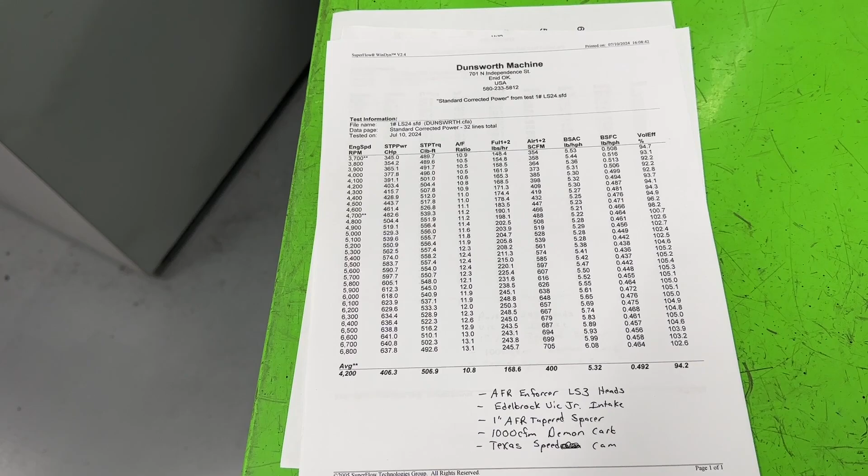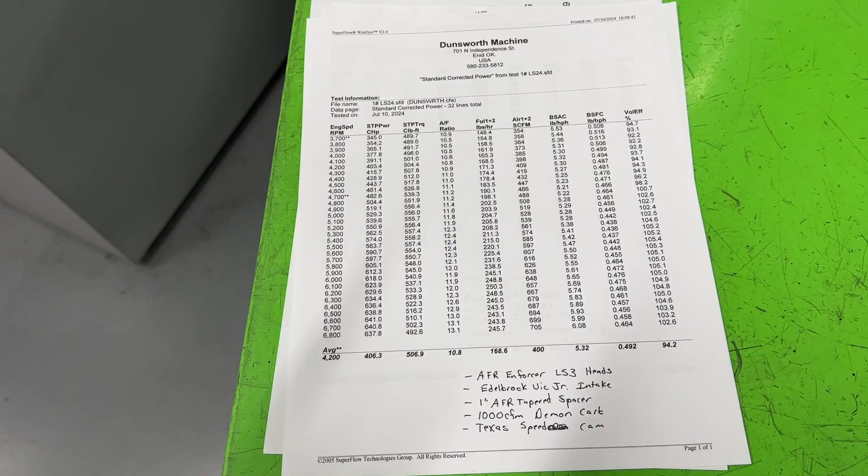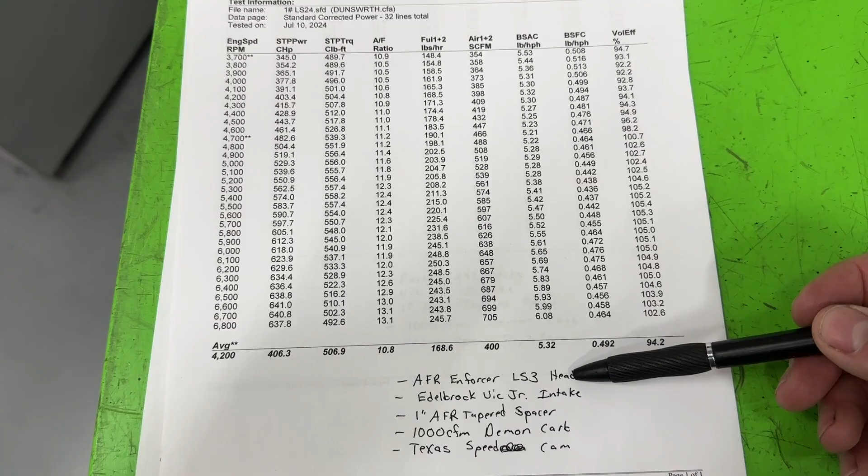This one you might have seen from the last video. This one right here is the AFR Enforcer LS3 head. So that's this head, completely stock.

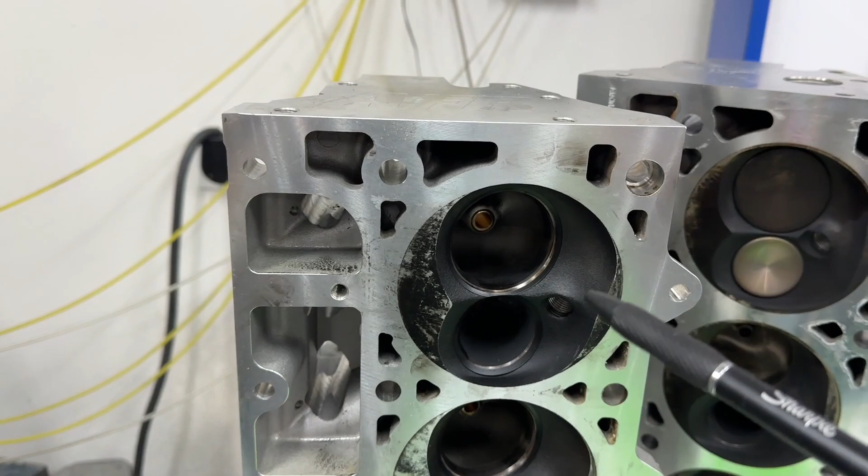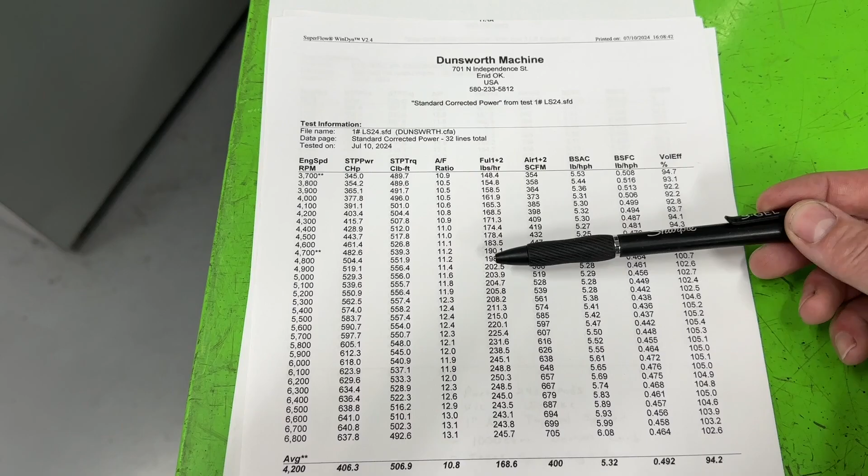I will tell you through this whole entire thing, ignore this air-fuel ratio, because right away it looks really rich. Some people have commented, why does it always look like your chambers are so black? You should really lean this thing out. This air-fuel ratio that comes here is calculated, and it looks like that, you would think it looks like that. But there's something going on with the air turbine, I think it's getting stuck or something. The fuel turbine, the way it works is the computer says this is the amount of air that goes through, this is the amount of fuel, that's your calculated air-fuel ratio. But that's not what the O2 sensor is reading, because I'm watching the O2 sensor, and it varies.

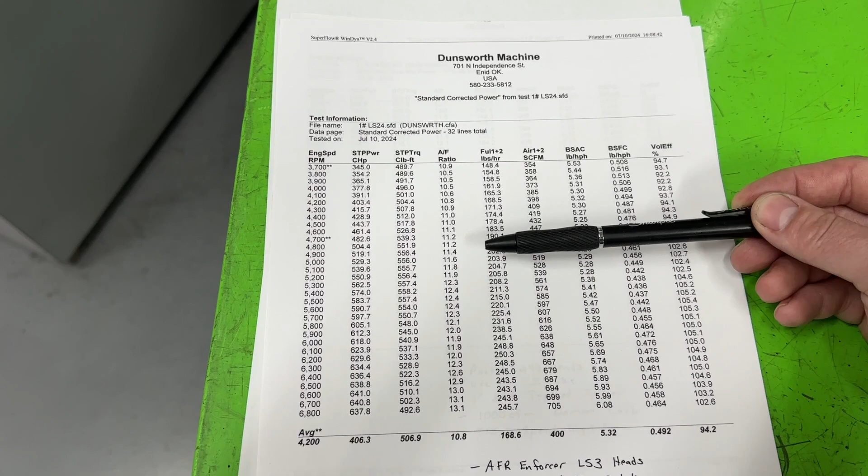So on an LS engine, this is weird, it goes really lean when you start a pull, then it gets almost normal in the middle, then really rich towards the end. This isn't tracking that at all. It's just not correct. So what I'm trying to say is you can ignore this.

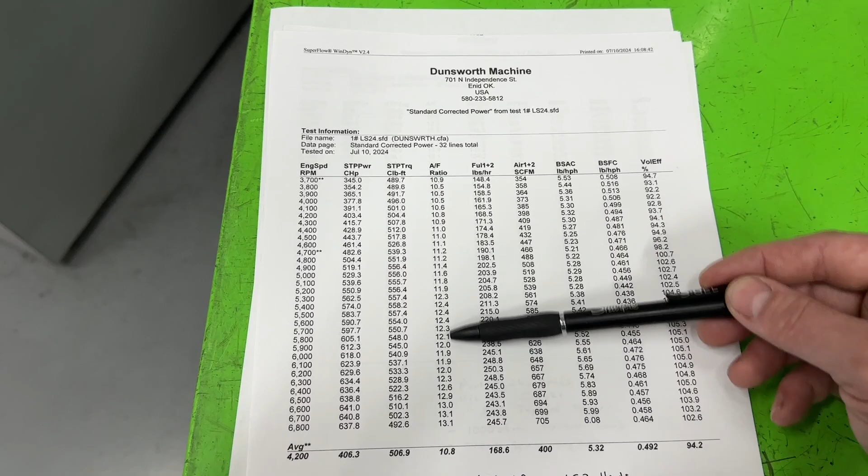Did you play with jetting and stuff? On some I did. And did you play with timing? Yes, for sure I did. So these I'm showing you are the best. This is the AFR LS3 - if you look, it made, with this Texas Speed camshaft, 641 horsepower.

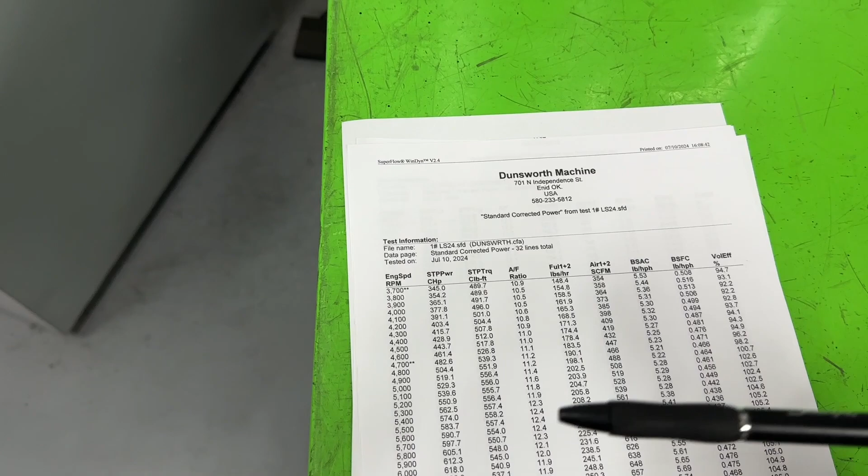Oh, one more thing, sorry I'm jumping back and forth. The other reason why these chambers look black, you might be saying man that sure doesn't look right, is this: when we're doing the dynoing, we get the engine up to temperature because we want the water and oil temperature to be the same when we test different heads. It doesn't sound like a big deal, but if you have cooler water on this head versus that head, that one will make more power because of the cooler water running through it as opposed to the other.

So it's not a fair comparison. The other one, which is much harder to do, is oil temperature. We measure oil temperature too, because another weird thing is if you get the water temperature cold and the oil temperature cold, it actually makes less power because it takes more power to turn the oil pump to pump the oil.

So what we're trying to get to, and it takes a while for us to get to the right temperatures, because we actually have to put a mild load on the engine, get it warmed up to hopefully put some heat in the oil, turn it off, let it heat soak for a while to try to get the oil temperature where we want, so we can get the water temperature where we want, so we can compare them. It takes time, and a lot of that time's in the idle and also the transition circuit.

And I can tell you, we're not tuning those on my carburetor. There's no sense, and part of that causes this. So we're running pump gas too, it's 91 octane with just a splash of 110. Clearly not enough, otherwise it'd be a lot cleaner. But pump gas is dirty for one, but also in that intermediate circuit, it's not ideally tuned, and I'm not messing with it. We're just dynoing. So sorry for getting off on a tangent, but that's part of what causes some of the carbon buildup.

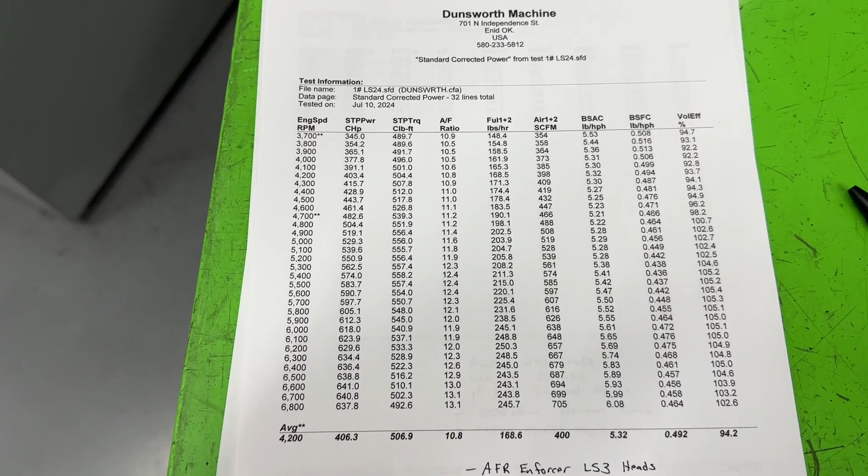Now back to their stuff. So the AFR LS3's made 641 horsepower, which is pretty good, and 56 foot-pounds... I mean 558 foot-pounds of torque, also really good. This one right here, because of these heads and they have the larger chamber, that's 11.1 compression ratio, okay?

Now let's see how these... I probably should have pointed out, I ported these 243 heads for a customer. I'm really happy with them. It's probably one of the nicest ones I've done. They're cut out to a 202 intake valve. They have a 64.5 cc chamber, which yields an 11.8 compression ratio.

I will show you the flow numbers and all that later. But they are ported by me, and which is weird, because of all the dyno tests I've done so far, small block, big block, none have had any of my fully ported heads on it by hand until now. So anyway, let's look at its numbers.

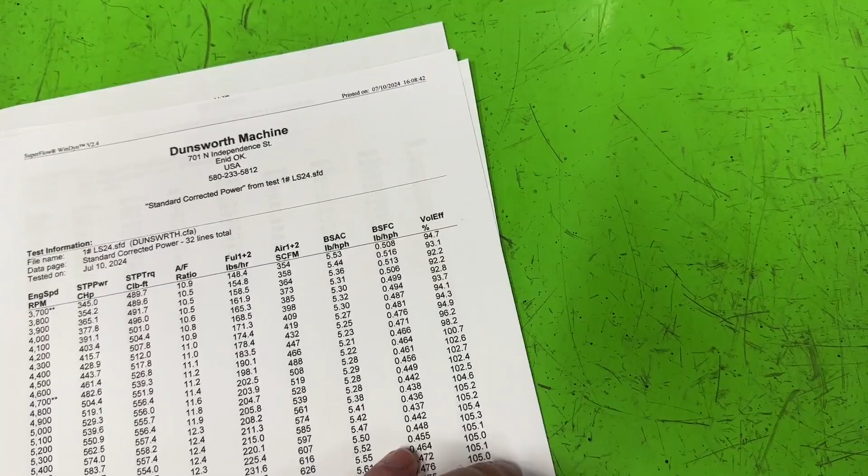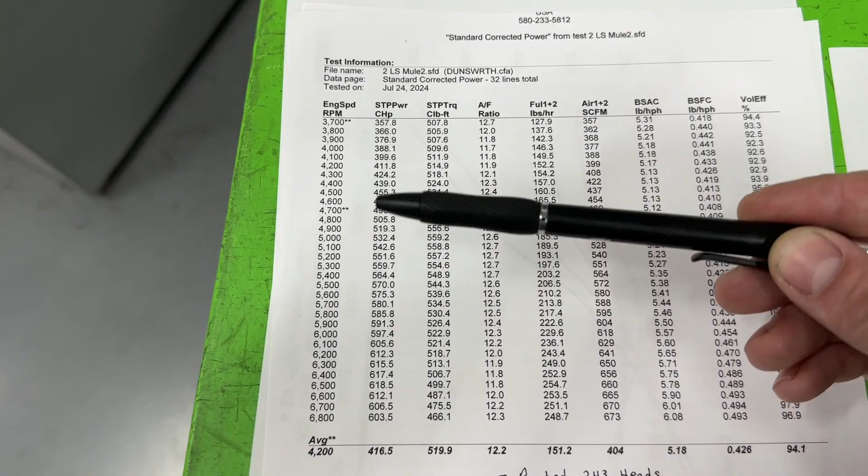Turn the page. This is with the 4150 carburetor. If we look, it made 618.5 horsepower, which isn't bad, and I did it at 6,500. Here's what's interesting: 6,500 RPM, let's see where it peaked over here on the LS3. You guessed it, 6,600 RPM. It's only 100 RPM more, which I'll show an overlay in a minute.

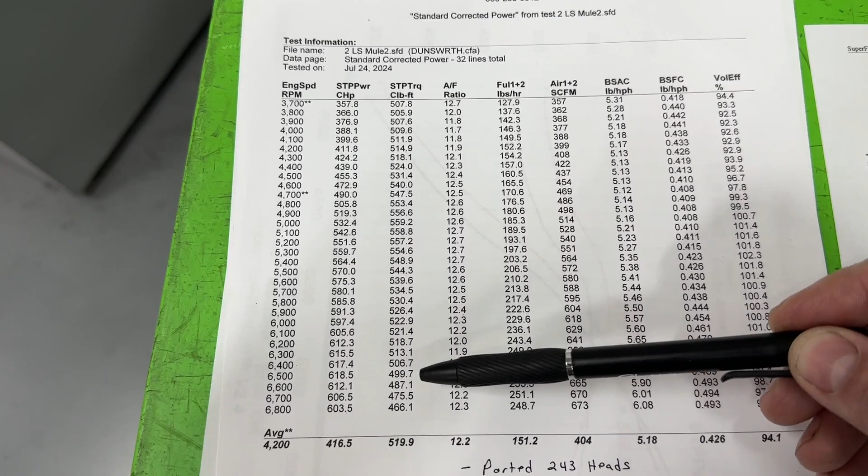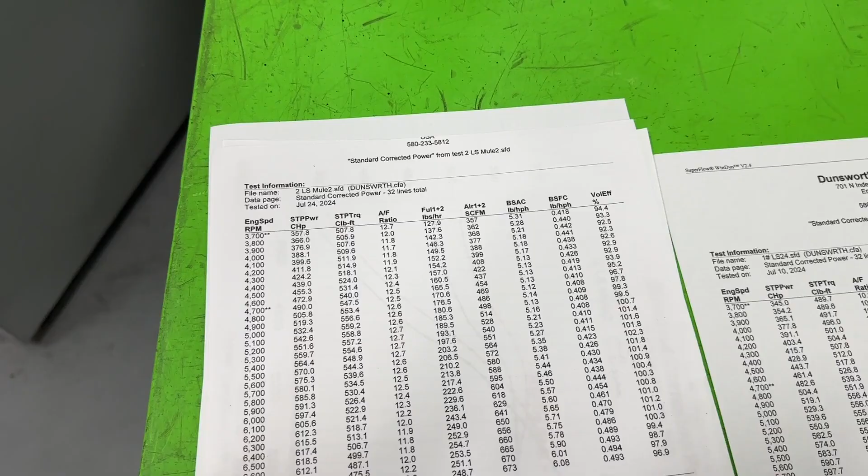If you look at the torque though, 559.2, so it was actually up over this AFR Enforcer. Now, once I give you all the information about the heads, you're gonna have more of a head scratcher, but really good. But this doesn't really kind of show the picture, the overlay does.

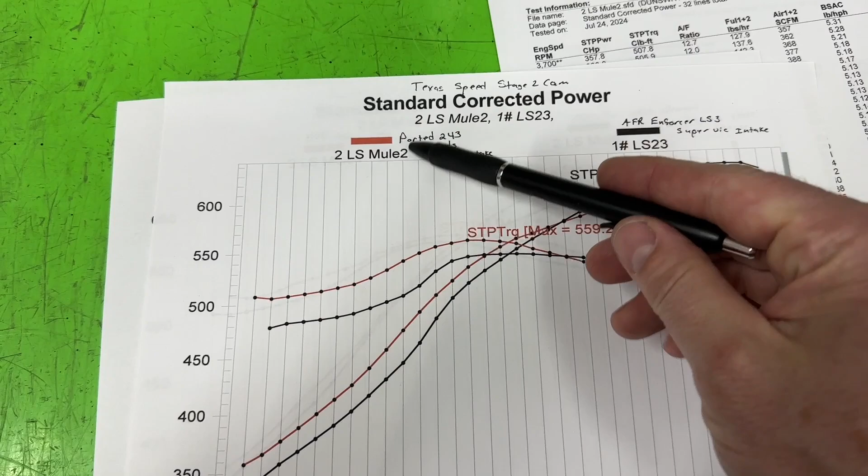So let me show you that. Here we go. This red line is the 243s ported. The black line is the AFR Enforcers. If you look, and we're starting to pull about 3,700 RPM...

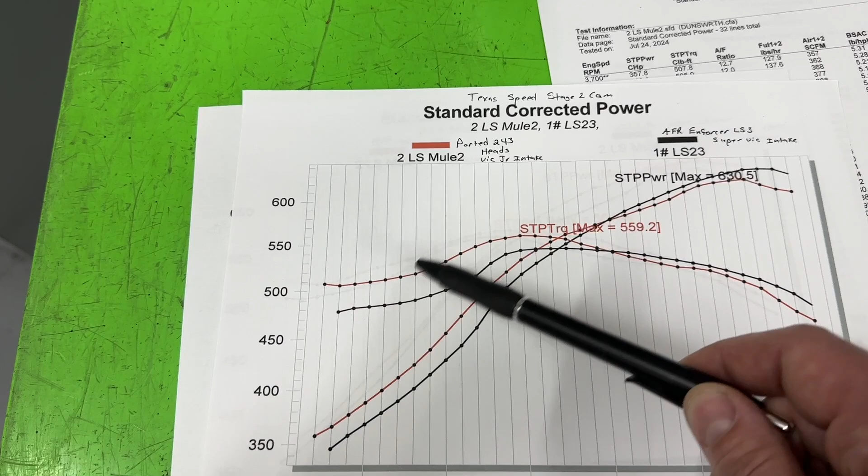The ported 243, and don't get me wrong, the compression's helping it because it's up probably about half a point, or well, more than half a point. But that's huge. It made more peak torque, and really, really good.

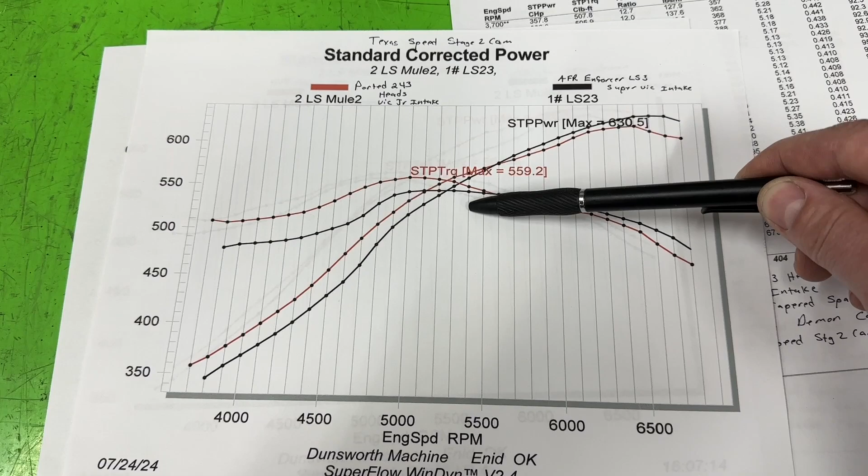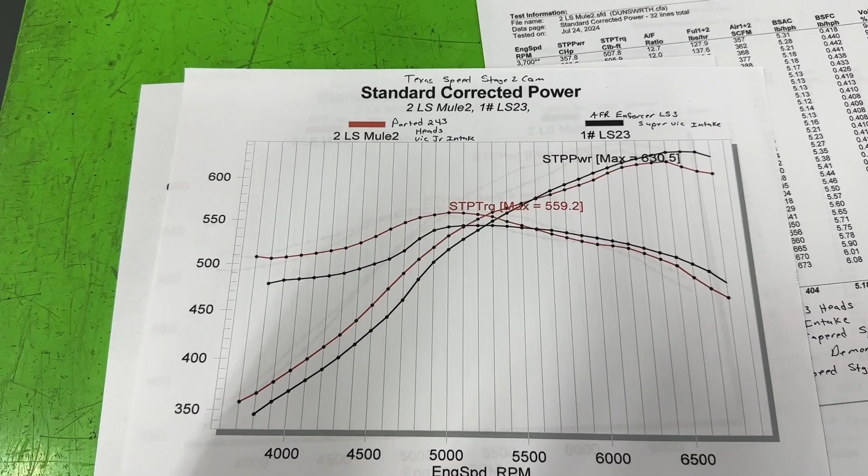It wasn't really... the 243 was beating it up until about 5,300 RPM. At that point they start diverging, and you can see the difference. Now, this was with a 4150 carburetor, but I am amazed at how close they are, because when I show you the flow numbers, they're not close.

But yeah, quite amazed. But dig this: this power curve you see here for the 243s was not the best power it made. This was the best power it made on a 4150 carburetor. The AFR LS3 heads, that's the best power it made, period, which was also on a 4150 carburetor. I'm confused. This is the same carburetor, same intake, spacer, everything combination. But the 243s did a lot better when the Dominator got on. It did this.

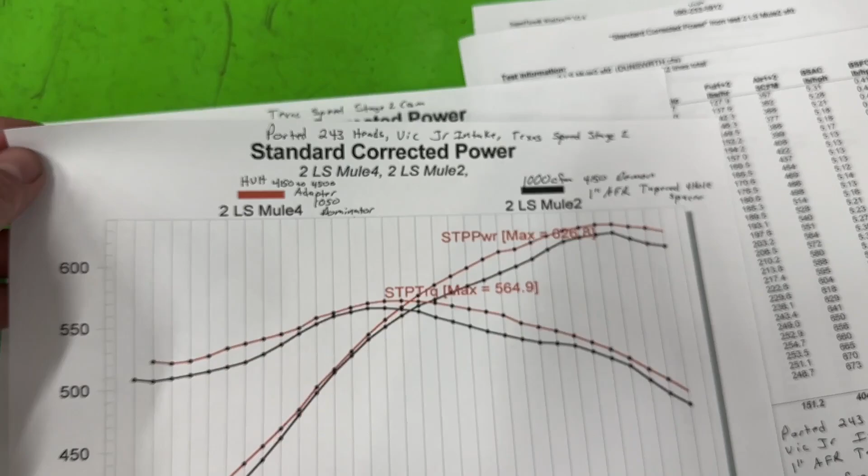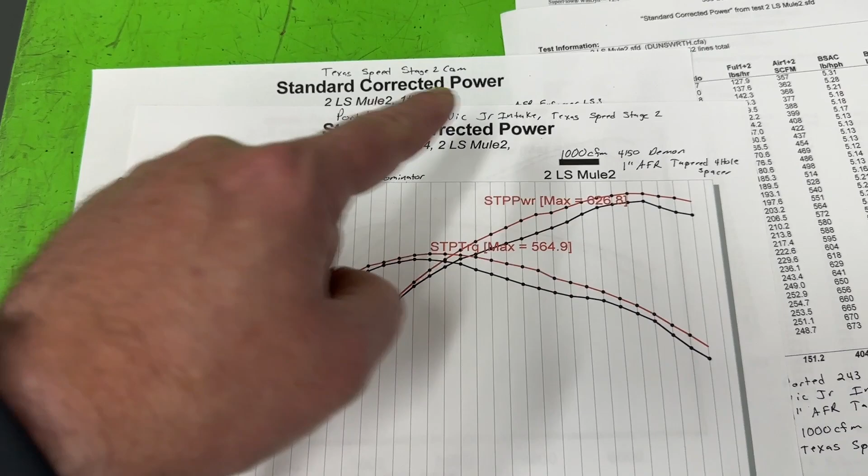This is just a 243 head, but this is with the red line is with a Dominator on it. So it's got an Huff tapered adapter that I love and has worked on almost everything. And this black line is with the 4150.

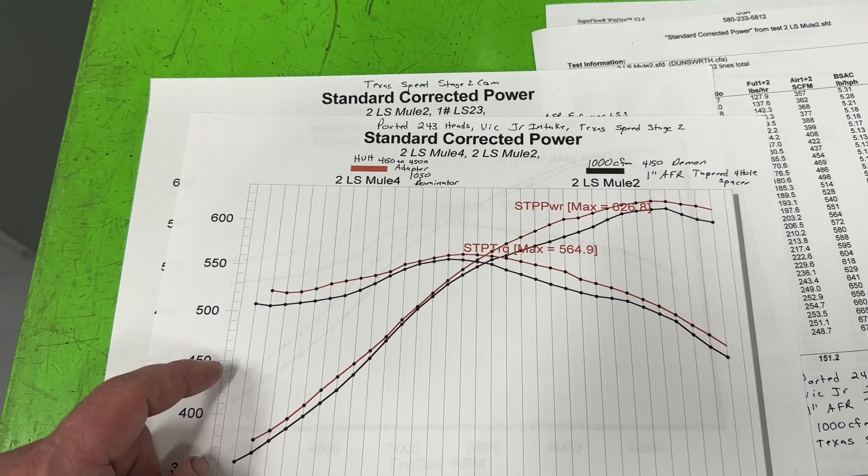If you notice, that Dominator on this LS has done just like it has on every other engine I put it on and head combination, with the exception of the LS3 rectangular port heads. That's the only time it does not work. But if you look how much it brought up torque, we're now at 565. And this is with the 243 heads, and horsepower went to 626.

So if we kind of go back, and I didn't do a great job of printing off the two differences because this was direct A-B comparison, same carburetor, everything. This is the 243 with the Dominator.

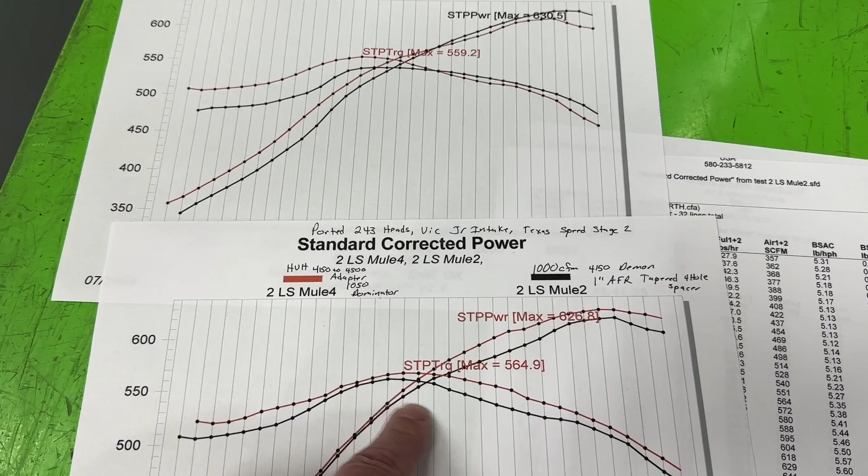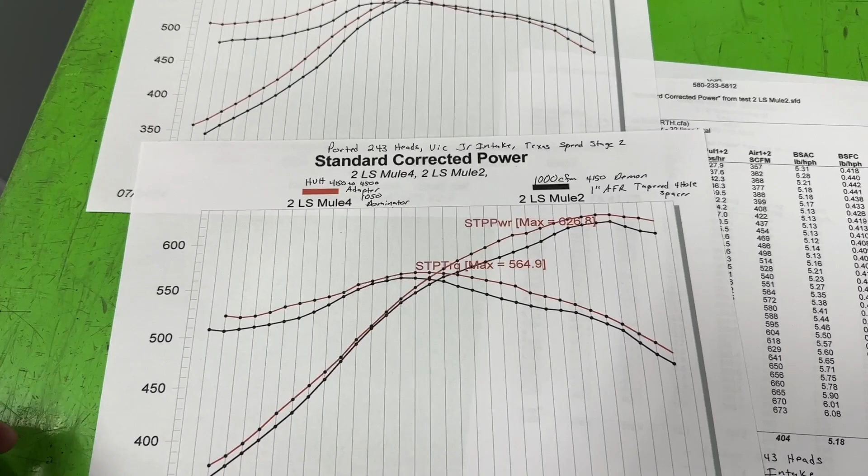Which if I'd done that, I could have done a printout of it, but I'll go ahead and tell you, when I put the Dominator setup on the 243 heads, it lost power. It did not make, it only made more power at the very lower RPMs from 36 to about 4,000. After that, it was a loss. And there's only been 3 times that's ever happened, and every single time it's on a rectangular port LS3 head. It's not been on the Cathedral. So that's a weird head scratcher in itself.

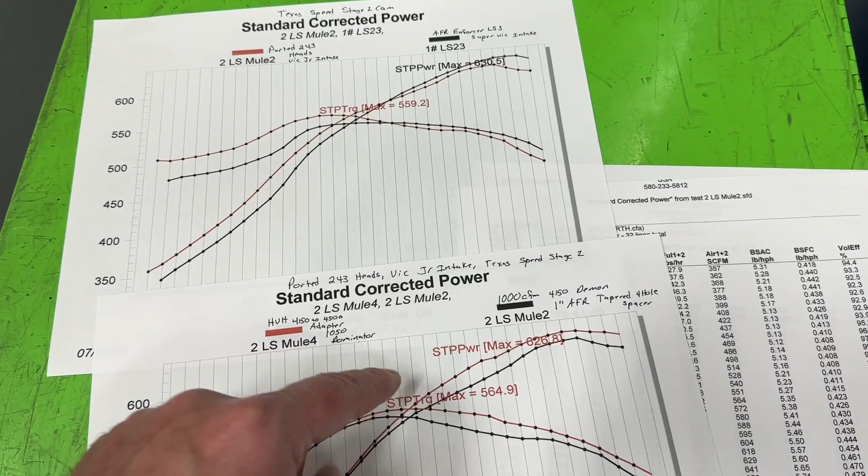But I didn't put this comparison on because it looks really, really good to compare to the AFR Enforcers when it's best. Because I should have said the best on the Enforcers, the best on the 243s, but if you look, now it's 627, 631 is all it made with the Enforcers at best.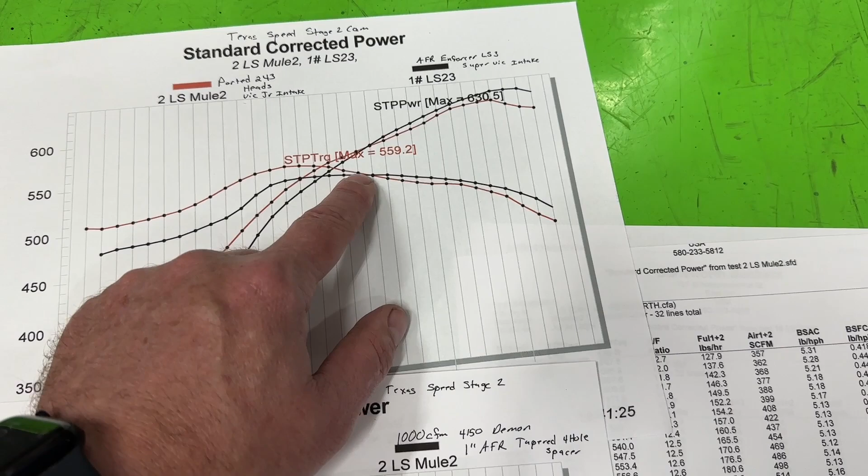You're down. That's right. Hardly any horsepower, maybe 5. But look at the torque difference. So 559. This one was, let's go back to a sheet, but I think this was 555 peak or something, I can't even remember, maybe 556. But this one's 565. Now don't get me wrong, compression probably makes up for some of that. But that's a little bit of an interesting finding when you think about it.

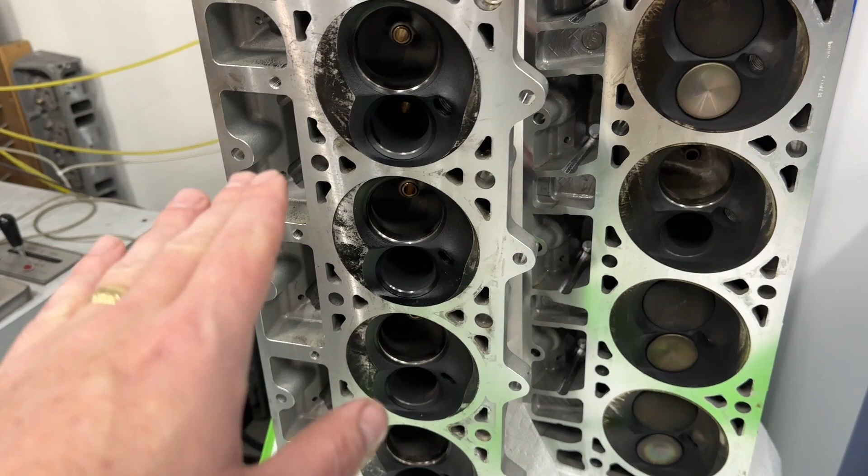Those heads are far closer when you have them peaked out. And I know that sounds strange because you're like, well, why didn't you put a Dominator? I did. It lost power. I tried, trust me, I tried. There's only been 3 situations I ever lost power, and that was one of them. But yeah, those are much, much closer.

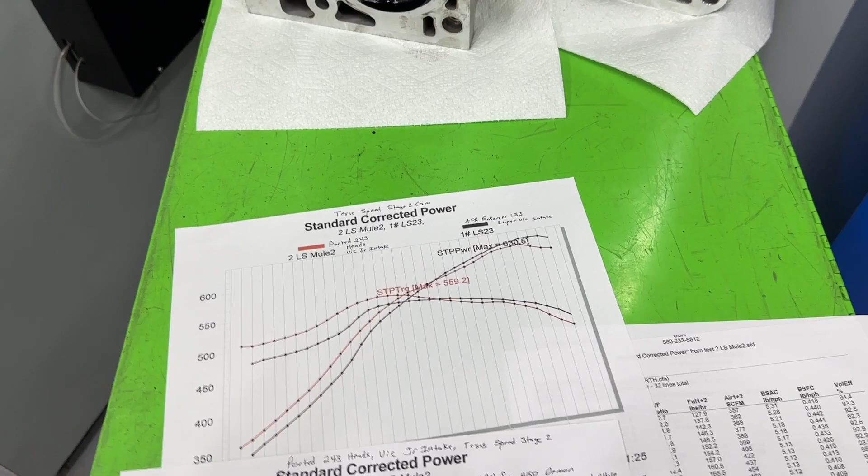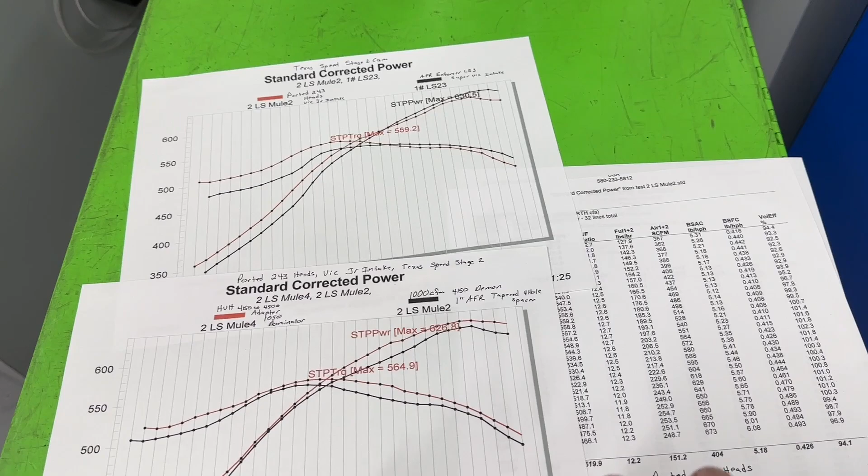But let me show you some of the data on the head, because I know some of you just care about this stuff. Let me show you some of the flow numbers and other data, actual like the volume of the head and things like that, so that you can kind of get a better idea for those that are into the information. But at least there you got your dyno numbers. They're close.

Very, very close. And I'll be honest, if you were driving on the street, I would take that one. I hate to say it. Because if you look at the design, this should be so much better. Port the 243s, and don't get me wrong, when I got done, because this is for a customer, this set of heads was expensive. He paid me, because I charge quite a bit to port, not like a ton, but well, I guess relative. But he also put in bigger valves and stuff, that was more expensive than that. But this one was, if you were driving on the strip, it'll kill it. It just will.

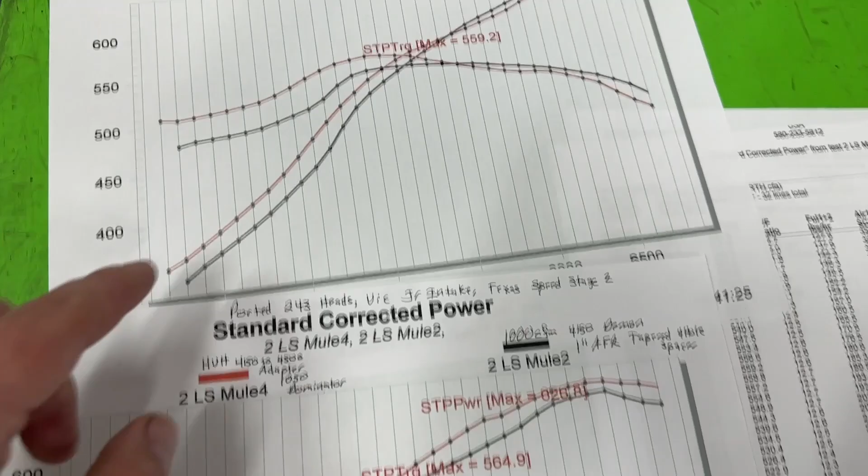Yeah, I know you're like, well, no, because you get like here, it's there. Yeah, put the Dominator on. And it ain't even close. So anyway, let me show you the data for the heads now.

Okay, I'll start with the specs on the AFR LS3 head first. It's a 208 1600. I know stock LS3 heads are 2.165, that's not what AFR chose for this. It's a 208 1600, 70.2 cc combustion chamber, and the volume of the port when I measured was 238.4 cc's. You need to remember that number.

Okay, this ported 243, I opened it up to a 202 intake valve. It has a 1600 exhaust valve.

This has a volume, so the volume when I cc'd it is 238.4 cc's. That head, the 243, and the AFR LS3 head have the exact same volume to the 10th, which is weird, I didn't plan it that way. You're like, oh my gosh, that's too big. If I said I have a Cathedral head that's 238 cc's, most of you would be like, it's too big. You just saw the dyno results. It didn't look like that way down low. But anyway, also a 202 intake valve, 1600.

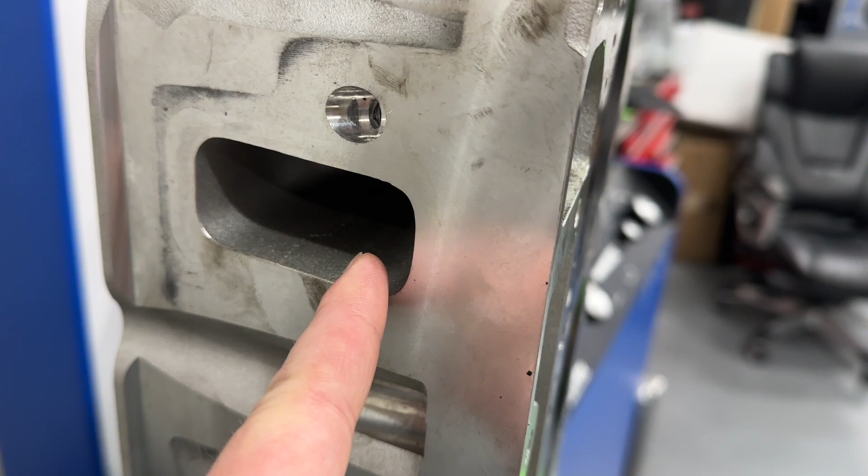Now here's what's interesting, those are just cc's, and you really can't compare them that way. Why? Because the center line distance is different. In other words, because this is an LS3 head and the port's raised up, it has a longer distance that the actual port is before it gets to the valve, as compared to the Cathedral one. So it's not a big difference, but it is some, and I'll show you that measurement in a second.

Just to give you, I'll just tell you, this one's my numbers are where I'm looking. The 243, its length is 5.43 inches long, as I measured it. This one on the AFR Enforcer is 5.5. So there's a 7/100ths of an inch difference for you guys. So there's some of your specs. 64.5 cc chamber, 70.2. To the flow numbers.

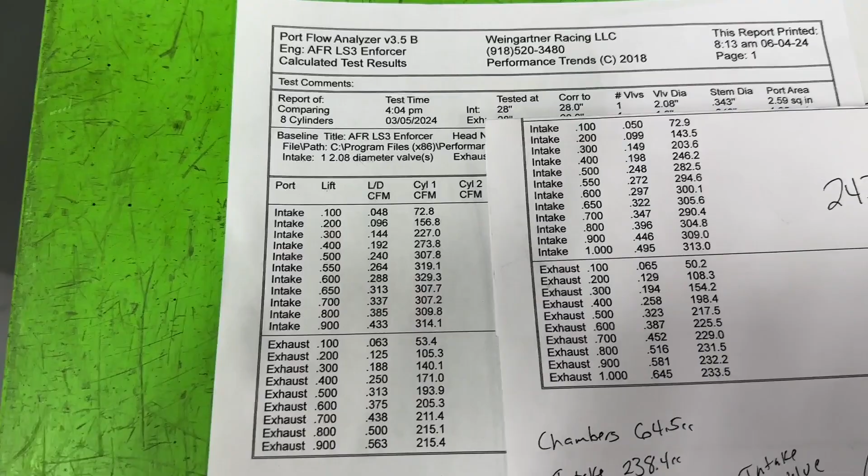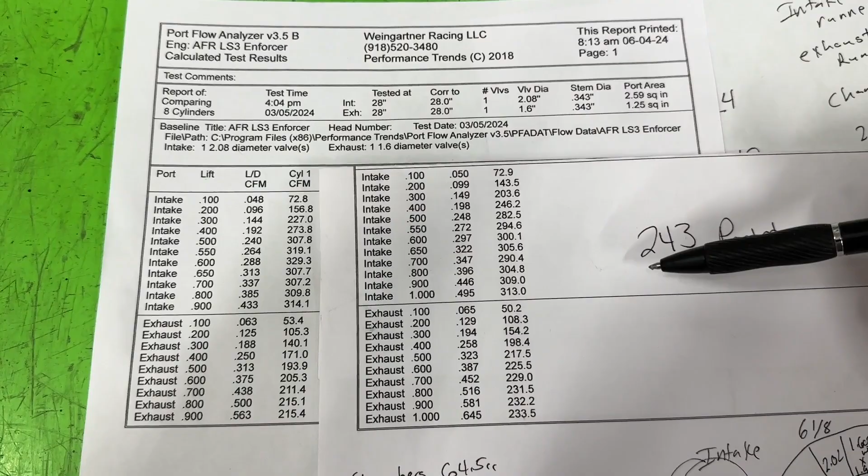This right here is from the Saenz bench. I flowed them on both benches, this is Saenz Digital 680. I also have a Superflow 750. This is from the Saenz, and I'm putting the 243 right next to it. So this is the 243s, this is the AFRs. If you look, it's obvious. They're close at one, not that it matters.

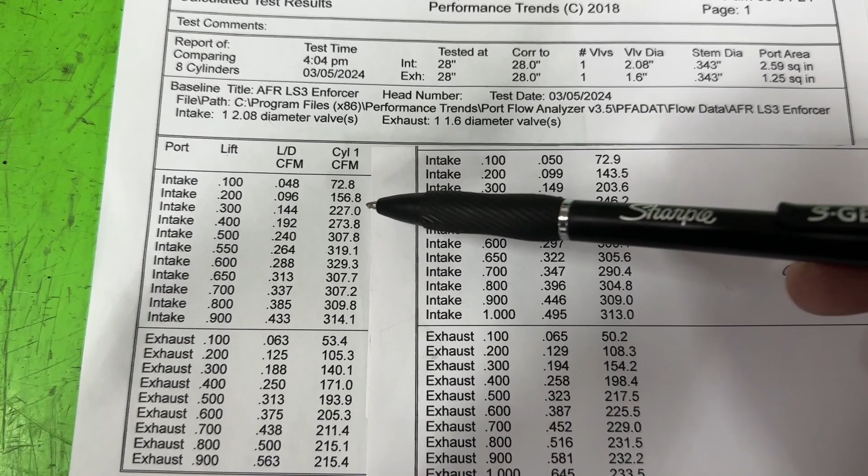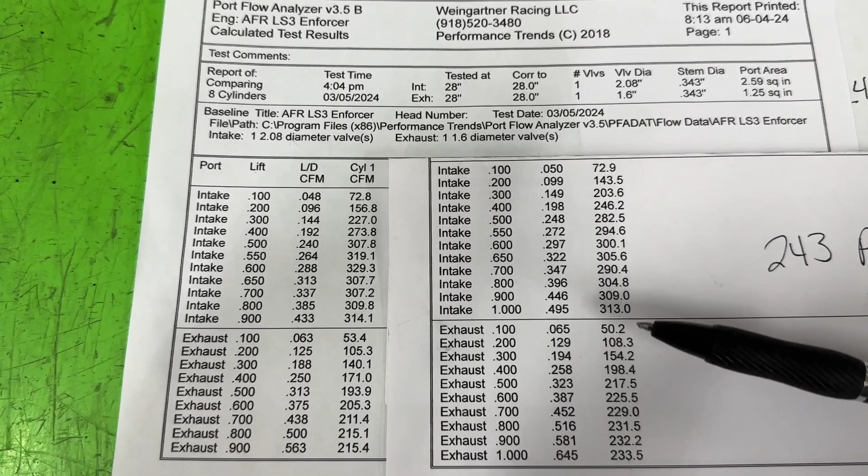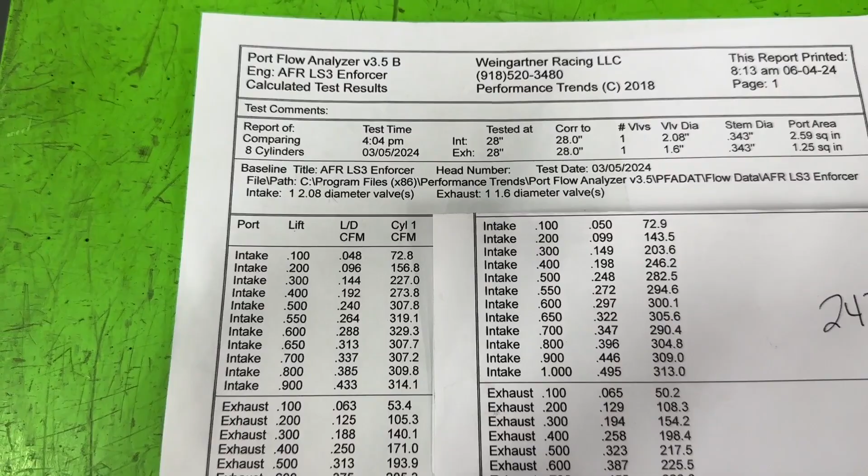143 on the 240, or 144 on the 243s to 156. You could tell, 227 to 203, 273 at 4 on the AFR Enforcers, 246. These flow so much less. And by the way, this is a really good set of heads that I did, gotta pat myself on the back, because this is probably one of the better ones I've done. At 600, it goes 300 on the 243s, compared to at 600, it goes 329. So if you just base it off of strictly flow numbers, this one's gonna be the dominating factor. Remember, it only peaked 100 RPM later.

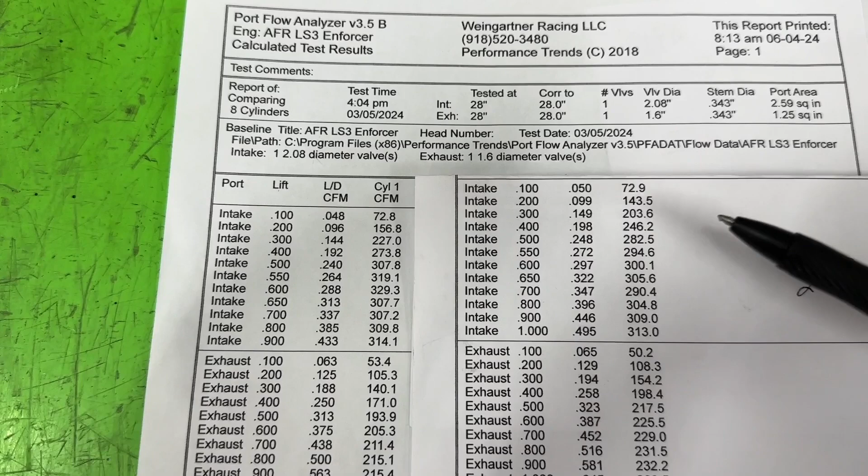So yeah, this is where it gets interesting though. Mine doesn't back up as much, so I lost 15 CFM at the backup. This one lost quite a bit more. Peak, which some of you are like, you don't care, it doesn't matter - it does matter, evidently. 309 to a 314.

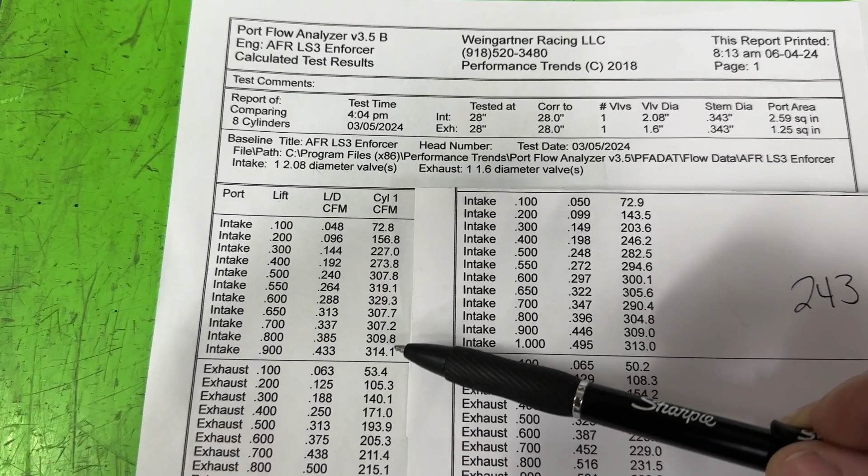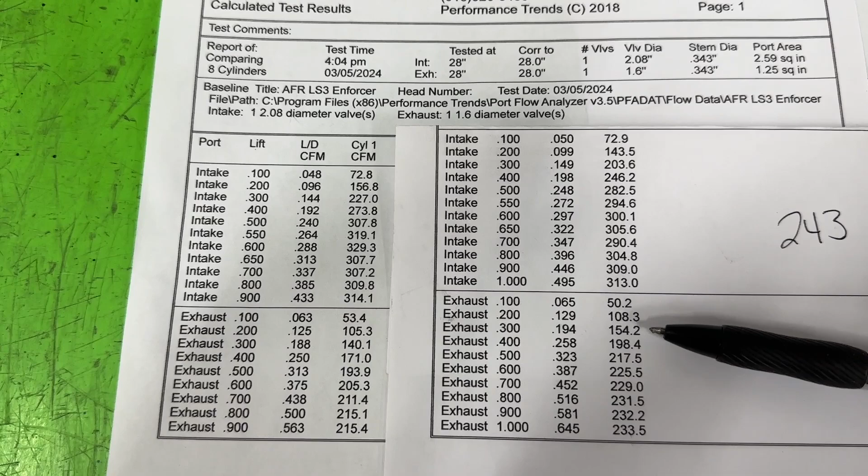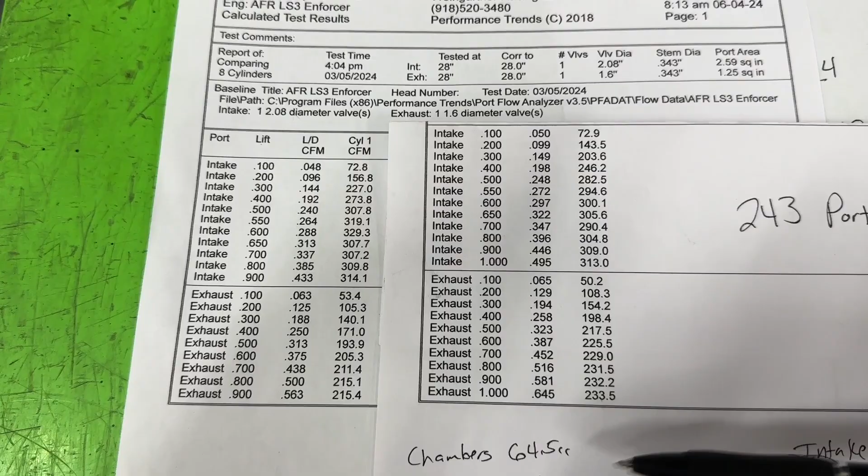So the exhaust side, that part's different. That's where I'm better. So not there at 1, but I'm better at 2, 108 to 105 than the Enforcer, 154 to a 140 on the Enforcer, 198 to a 171 on the Enforcer, and I'll just go up to peak, 234 to a 215. So I outflowed on the exhaust side, it outflows me on the intake side. Remember, I'm still a smaller exhaust valve, period, 1.55 to 1.600.

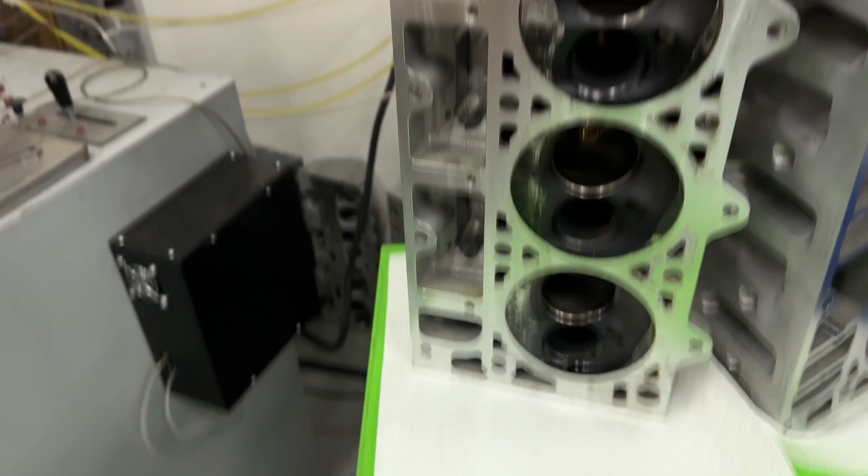Larger intake valve, which I forgot to bring this up. When I was bringing up the small block Chevy versus the LS engine, several people said, well, the reason why the small block Chevy had better was because it had a bigger bore and helps the heads flow more. That's somewhat true, but not entirely. The biggest thing that has an influence is where is the valve in the bore.

On a 243 head, it's in a stock location, which is pretty close to the actual chamber, which you can kind of see. AFR moved the valve, so if you look, it moved it over. They do this on their LS3 Mongoose heads even more. But that valve is moved over towards the center, away from the bore. So when you do those comparisons, don't assume just because of the bore size that it actually flows more. It's the valve relationship. So if you take a small block Chevy, for instance, it's actually closer to the bore on a 4.155 bore than an LS3 head is, well, this AFR LS3 head, because it moved it off.

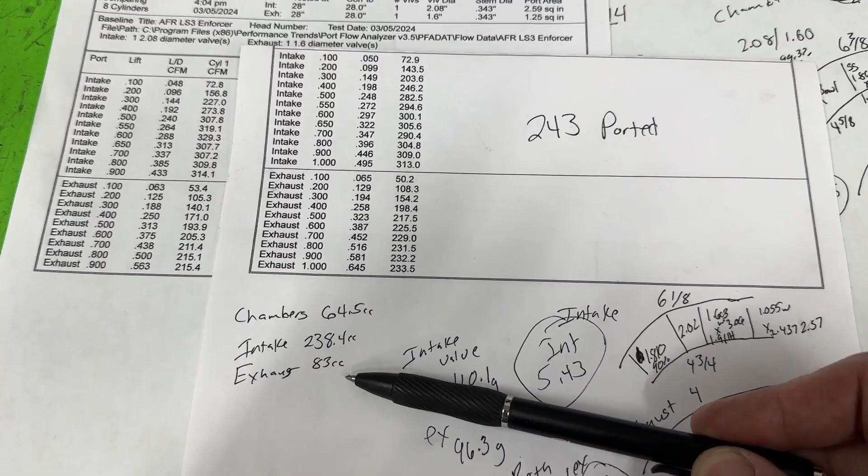So you really can't use that, that's what I'm trying to get at. Anyway, back to some more of the numbers here. There's your chambers, this is the 243, 64.5. Intake was 238.4, exhaust was 84 or 83 cc's. Oddly enough, this is from the AFR Enforcer over here. So let me just move some stuff around.

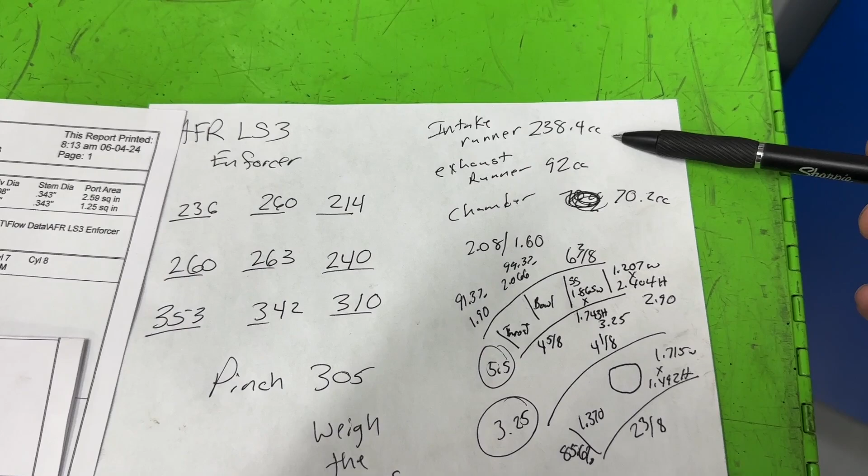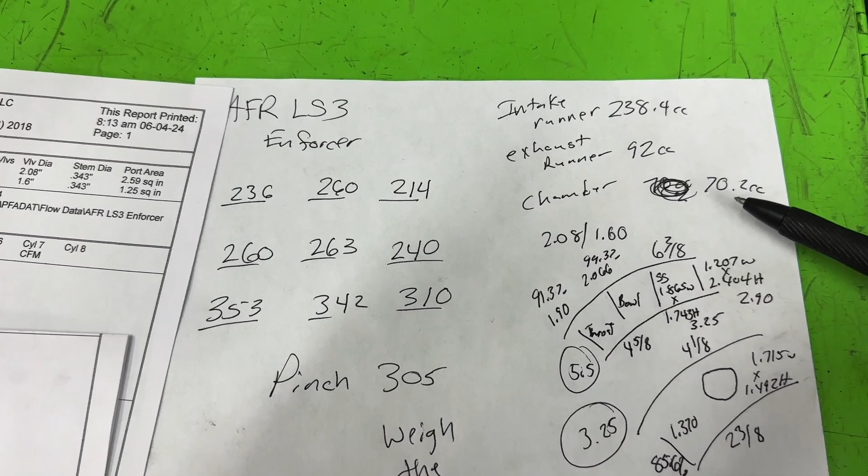If we look at the AFR Enforcer, it had a 238.4 cc runner. Same as this one. Exhaust was actually bigger, 92, compared to this one was only 83. It's a little bit longer too, though. Chamber is 70.2 cc's compared to 64.5. And then we get our lengths and measurements.

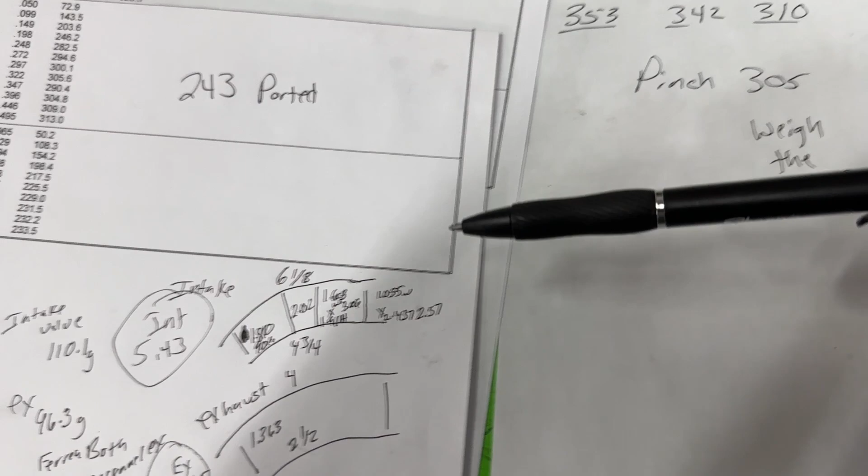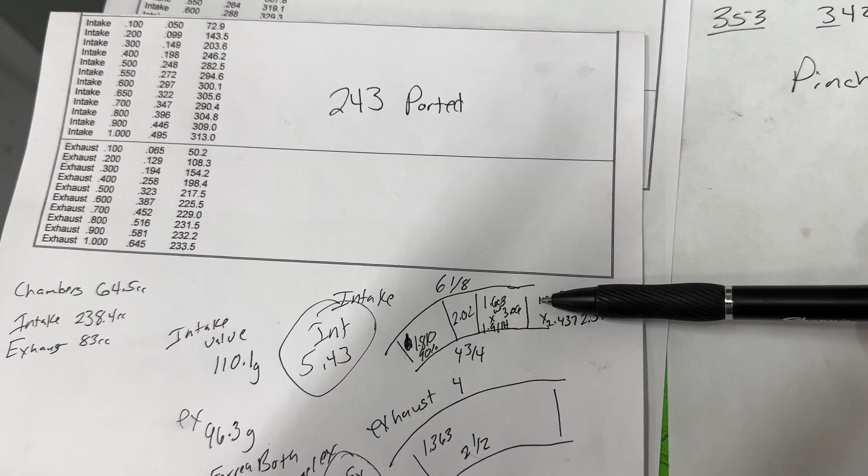Now here's what's interesting. This is the AFR Enforcer, the bigger one, obviously. Its minimum area at the pinch is 2.9. On the Cathedral head, it is 2.57, because that's where it's narrowest at, right through here in the beginning. So it actually has a minimum cross section that's pretty small, and then it gets much larger as you go through. This one's still got more there.

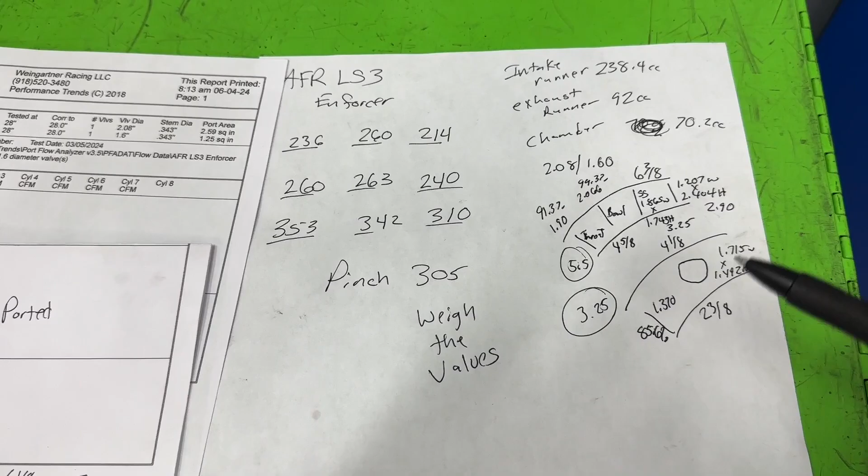So you would think that this one should be dominating. Don't get me wrong about compression, but still. Anyway, very interesting to say the least, but I want to show you one more thing that you probably don't even care about. By the way, I did weigh the valves.

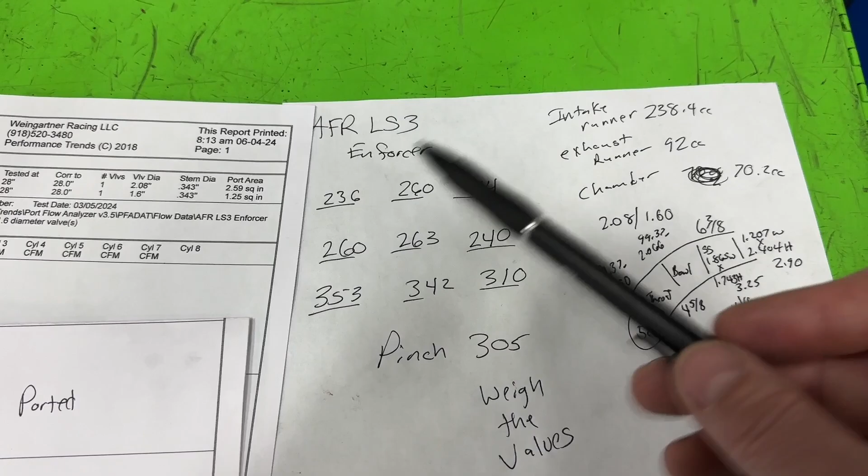This is actually, I took velocity measurements from inside the port over the short side. This is just for fun. Most of you guys don't even care, but that's feet per second. I didn't do that on the 243s because I hadn't really planned to test them. And then I did, and I was like, oh crap, I'm not gonna redo it though. Anyway, one more thing I'm gonna show you is the swirl numbers.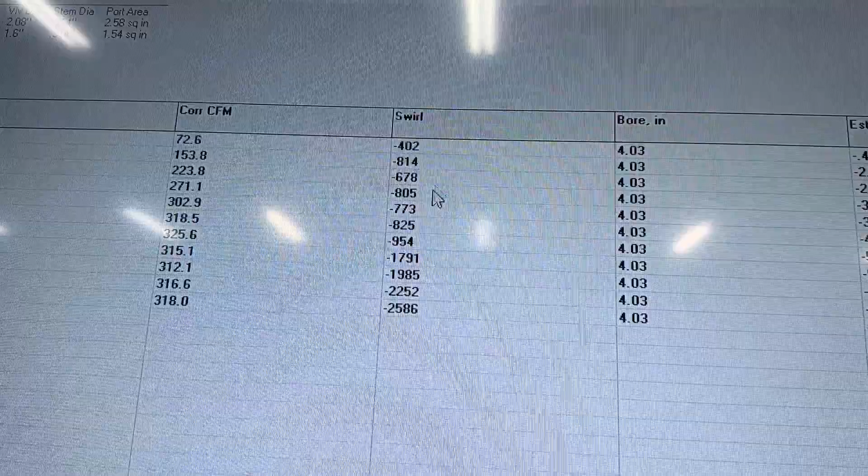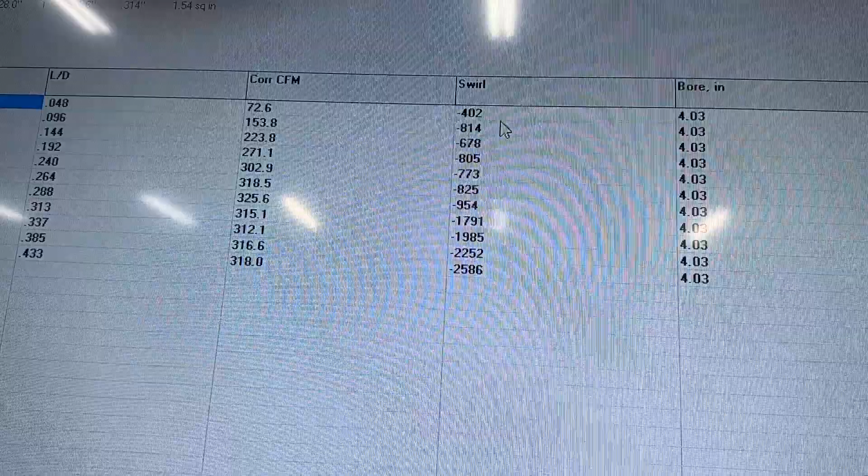It actually has quite a bit of swirl for an LS3 head. Usually LS3 heads have no swirl, or usually LS heads in general have no swirl. This still cannot compare to like a small block Chevy. A small block starts about 1,000 RPM and then just keeps ramping up. But if you notice, it's about 400, 800, 600, 800. I mean, it's okay, right?

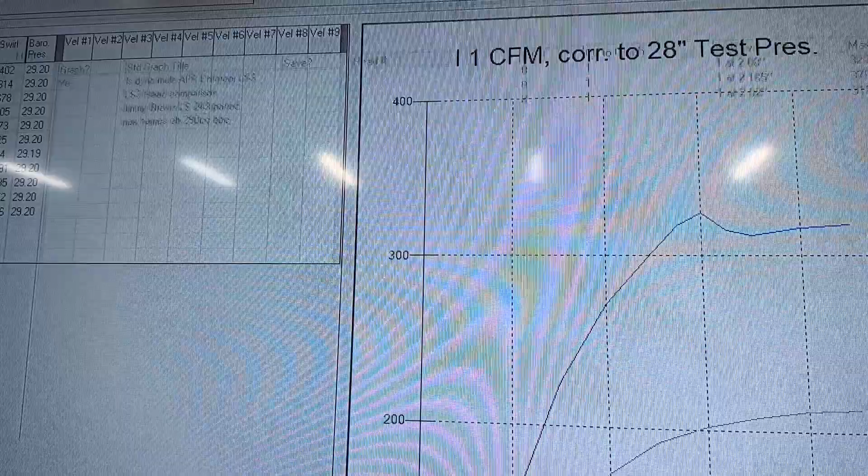So, interesting. But let me show you the one for the, I'm gonna go back a little bit from history. I'm gonna show you that 243. You might say, why didn't you print this out? Well, my printer's out of ink. That's why. So we're gonna go report, make a report.

There we go. So this is the 243. Look how much better it flows on this one. Let me get my mouse together. Look, it did 319 at 1 inch. And it was doing 252 at 4, so it's better. See how much better it flows on the Superflow? Kind of cheats up the numbers.

Swirl numbers. Look at that. It had no swirl there at 400. None. The air's just moving down. There's no really swirl happening in the middle. But then once it does start, it's a little bit faster, but it has nothing there.

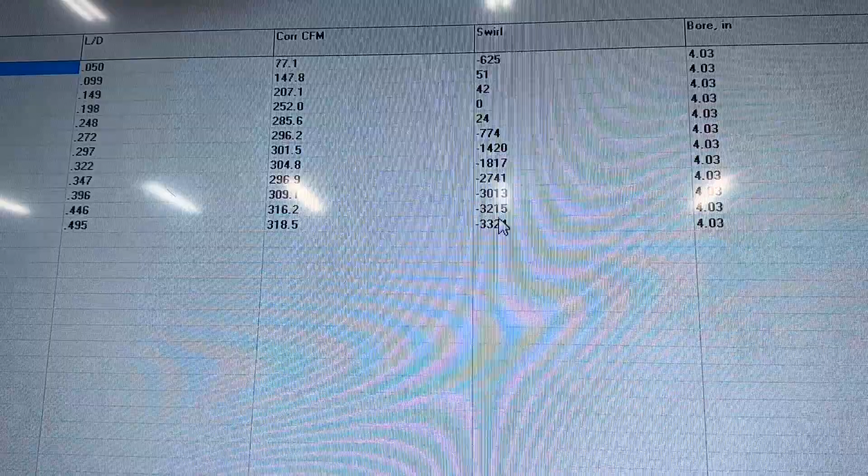Just an interesting thought. Anyway, a little bit longer of a video because I gave you so much information. Guys, thanks for watching. These AFR Enforcer heads will be getting some port work done, and we'll get to retest them.

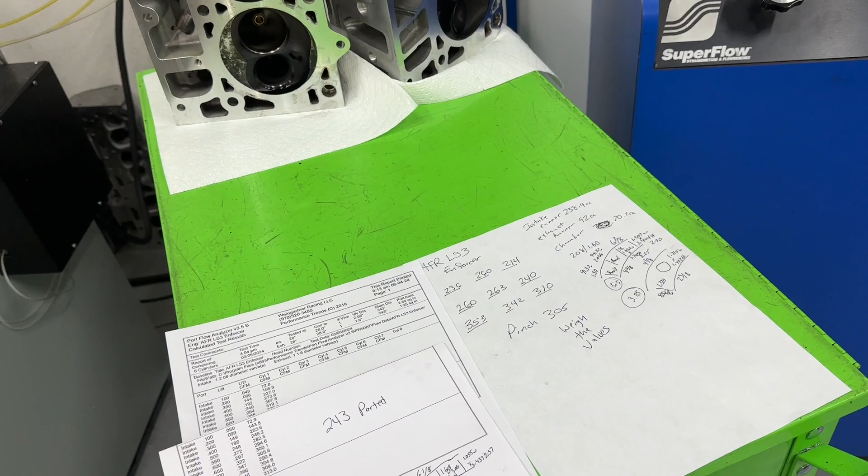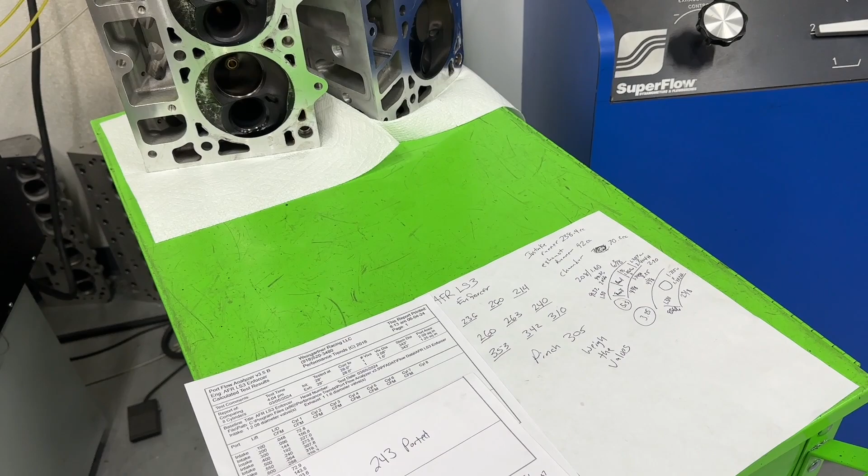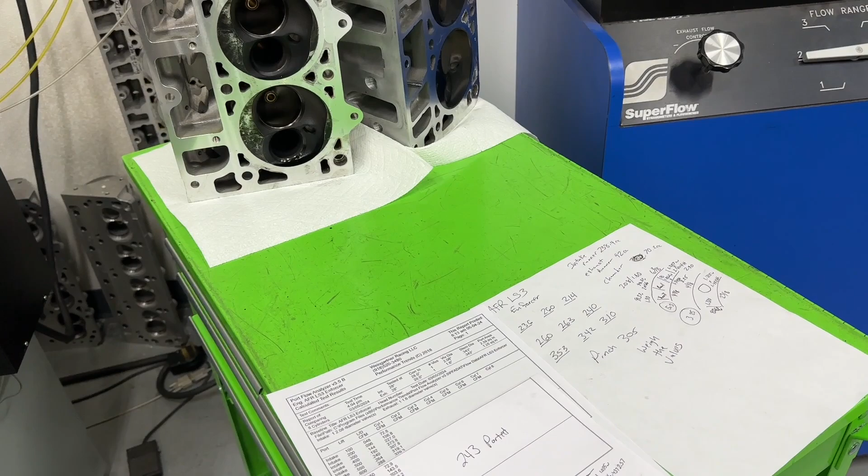And if there's something you want to see tested that I can do easily, I'll do it. Especially if you have an intake manifold for an LS3, because I've only tested 2, because I only got 2. Those are like the easiest thing to test. I would love to change and see what could happen.

Will these 243s be going back on the dyno? The answer is no. I know some people want to see more tests done with those. They're not. So I'm going to clean them back up and get them to the customer, put my stamp of approval on it, because you gotta admit that's pretty good power, especially from a stock Cathedral head. So I don't know, it's pretty good, especially with a so much smaller valve too.